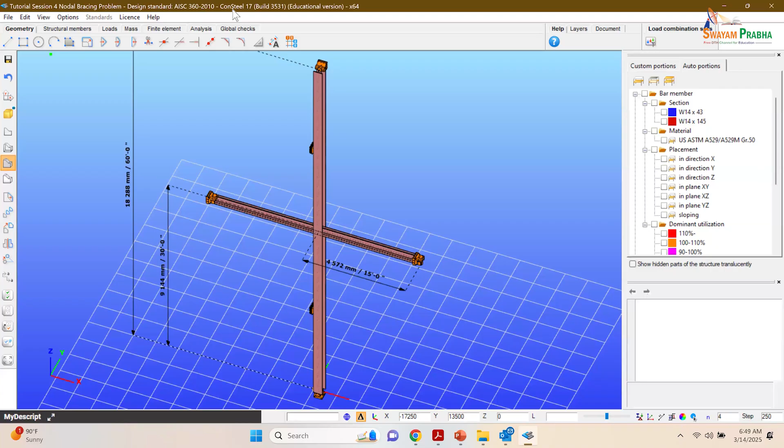Our basic bracing case here. So, in the analysis models folder on the Google Drive, there's a file that's basically a CSM file for Consteel that says tutorial session 4, nodal bracing problem. So let's pull that up and look at it together. I'm going to use the model in Consteel to explain the problem we're solving.

This is a problem that is an example in the AISC Design Guide 28 on stability design of buildings. What you're looking at here is a model of a situation where you've got some sort of a vault or an opening that this column is adjacent to. And so the column needs to span from top to bottom.

18.288 meters, or 60 feet, top to bottom. And because of that—it could be a boiler we're supporting in there, or some kind of shaft opening that we can't put framing into—that column has to span that entire height from top to bottom, but we can brace it at the top and the bottom.

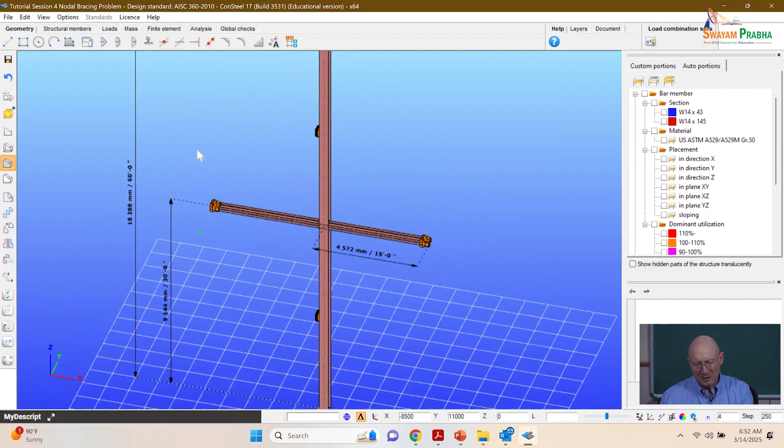So what we're going to try to do is put in a moment-connected beam. A typical term for this is a flying beam that basically flies across and is framed into this column at its mid-height. And you can see how that's working there, right? So that's still a relatively lightweight beam that's framed into the middle of the column.

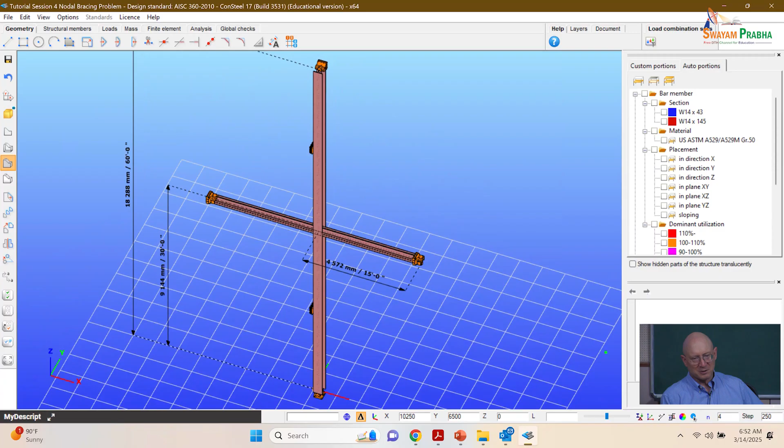The total span of that beam is 30 feet across this shaft or opening. And so we can basically tie that beam in, simply supported, into other stuff at its end.

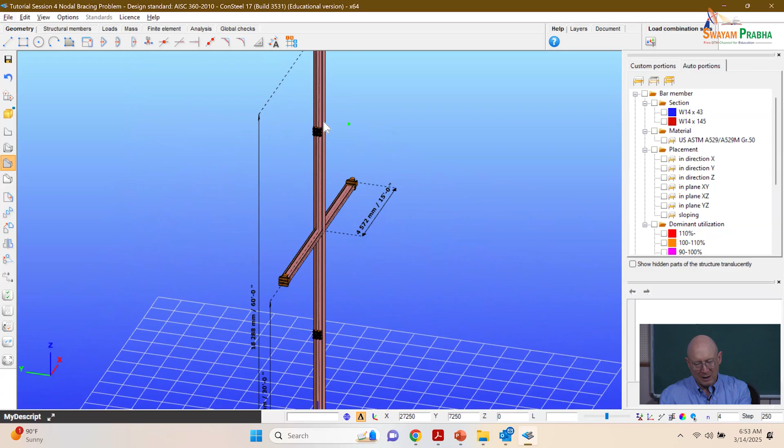Now, in addition, we've essentially got 4 stories here that are each 15 feet, and so within the plane here adjacent to the shaft, we were able to get some rod bracing in to brace the length. So in the weak axis bending direction of our column, we've actually got an unbraced length of 4 unbraced lengths of 15 feet.

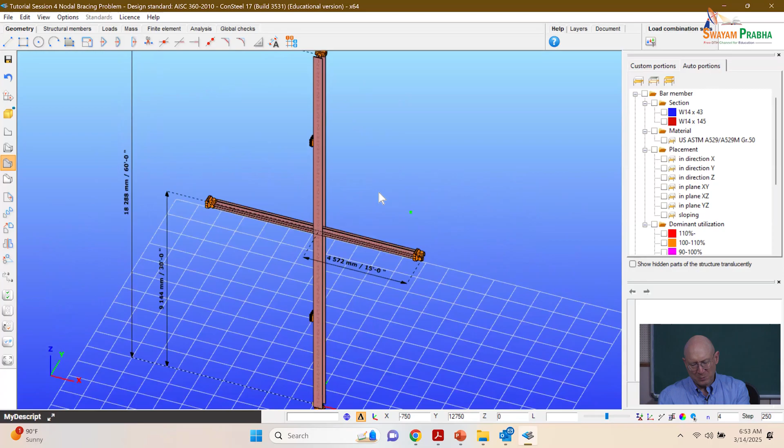Again, it's simply supported at the top, and that's it—that's pretty much our system. Now you can play with this.

If we turn it to a line mode, you can click—let me turn off the portions dialog there—so you can click on a bracing and say, okay, I'm supporting the column at the top in the X and Y direction, and I'm preventing twist at the top of the column. So that's my boundary condition at the top of that column. I'll hit delete selection to take away that.

If I look at the boundary condition we're using at the ends of the beam, X, Y, X, X—so we're preventing twist about the X-axis at the end of the beam, and we're preventing X and Y displacement, but allowing Z. The reason for that is if I restrain the Z, I would get some weak axis bending in this flying beam when the column shortens.

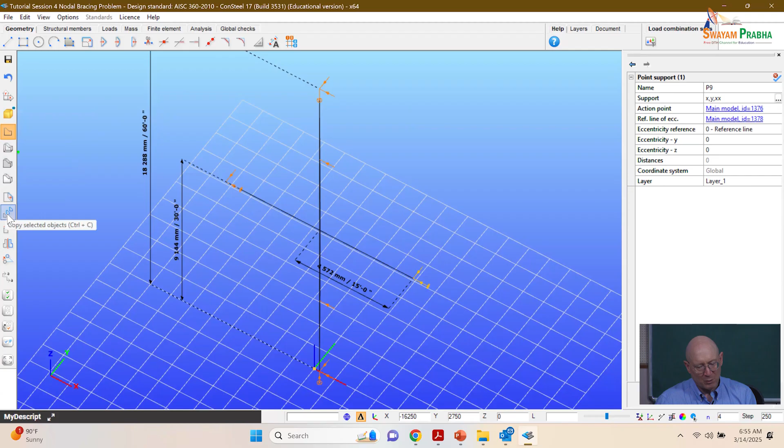And so we're basically trying to do an idealization where we're not going to be producing bending in that beam, right? So here again, the beam is in strong axis bending in terms of supporting the column—buckling major axis bending in the direction normal to this side of our shaft.

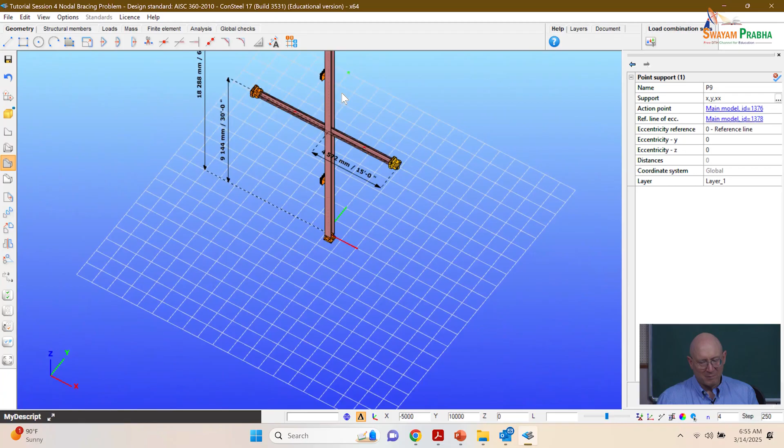And other detailed boundary conditions—if we zoom in, if I click on this guy, I can see... well, I've got to delete the other one. Okay, so click on here. Oh, that's just a support in the X direction, so that's like giving me rod bracing into the web there at the middle.

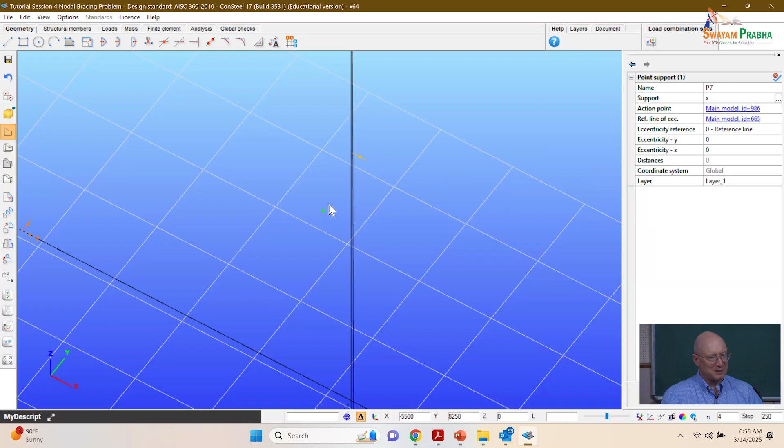So remember, with a situation like this, we might need to worry about torsional bracing or torsional buckling, right? Again, we're spanning 60 feet, except we're grabbing the middle of this, and it's major axis bending in and out of, or normal to, this wall of the shaft. Our flying beam is in major axis bending to try to provide support to the middle of the column.

Okay, so let me ask you: what type of bracing is the flying beam providing to the mid-height of the column? Nodal, or point, right? Okay, this is a good example of a nodal brace, or a point brace. Okay.

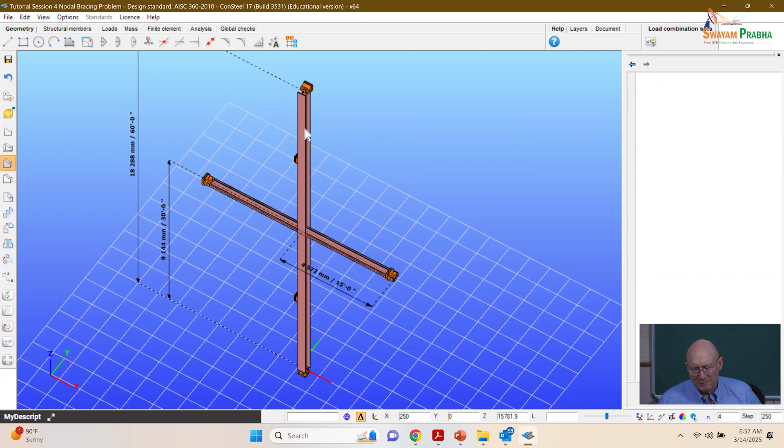Now the sections here, if I select on the column, when I defined the column model, I defined one member up for the whole 60 feet. Are you talking about the column? Yeah, and KZ? KT, the torsional - KT won't matter. What I call J is KT? Yes. So KT will be equal to KY in this particular case, the usual case we were talking about the other day.

When we say KY there, KT is basically the sum of BT cubed over 3 of all the plate elements - I was talking about the effective length in torsion. So the effective length in what we call the minor axis, KZ, right?

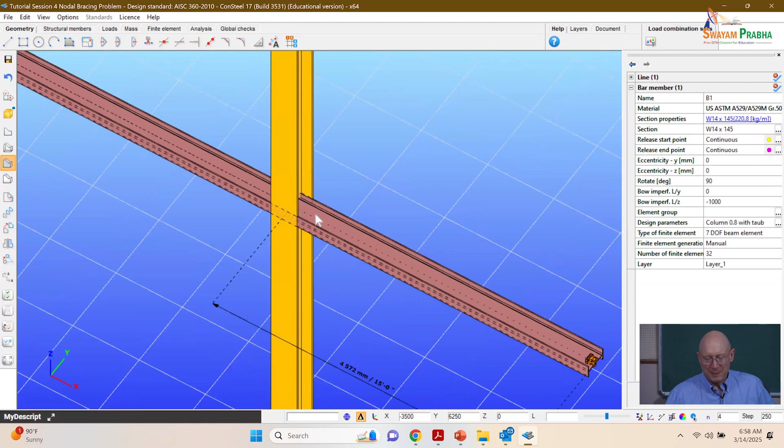Let's talk about that. What I'm showing you here is KZ equal to KY. Again, these braces right here, what I just showed you when we clicked on that - I've got to delete that selection. So that's just support in the X direction only. So KY will be different. Okay, thank you.

So if you basically said what's the unbraced length LY for the column, what did you say it is? The whole thing is 60 feet. It's 15, 15 feet, right? And then what's the LZ? It's 30, 30 feet. Everybody good? Okay.

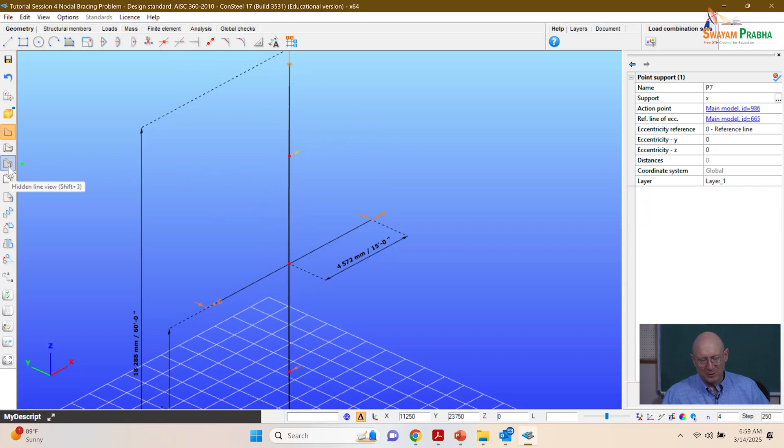All right, so that's our situation here. We'll come back to this view again. Now I'm going to show you a few things that are fairly powerful in Consteel.

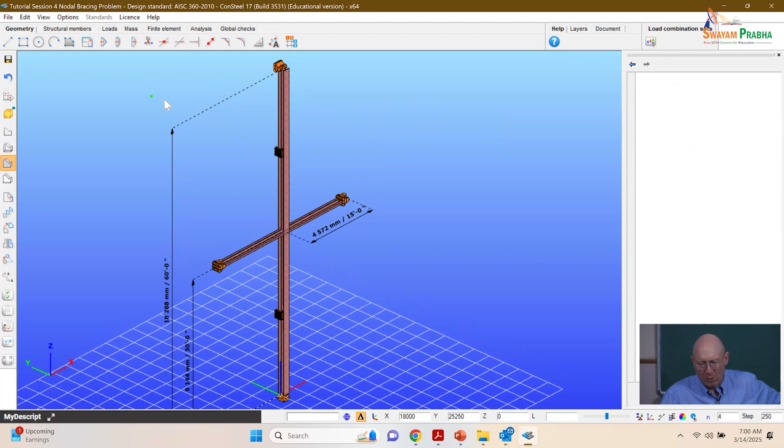I guess the other thing I haven't shown you, but there's a handout, a PDF file that parallels this and explains the loading. We've got an axial compression coming in at the top of this column, 1,400 kilopounds, so 6,227.5 kilonewtons that we're supporting.

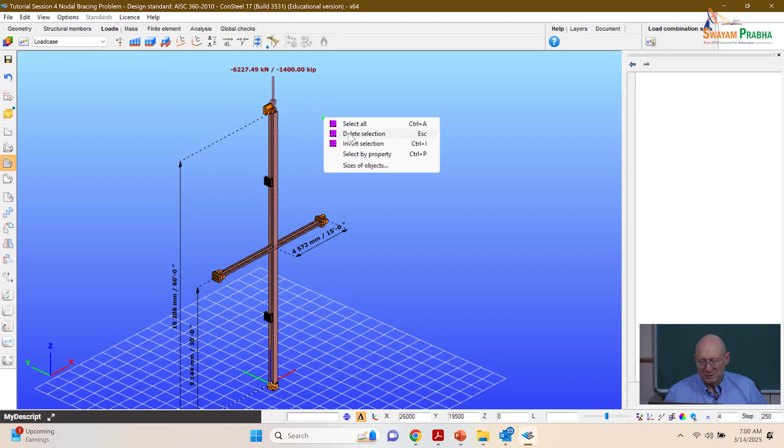And if I come back here to look at what this column is, if I click on it, I can see in the object properties table that's a W14 by 145. I put that in imperial units - I should have put it in SI - but that's nominally 14 inches deep, 145 pounds per foot for the column.

This is exactly the load and the section that's in Appendix, in Design Guide 28 of AISC. And then I'm using here the flying beam to get that brace at the middle. We're getting bracing stiffness to the mid-height of that column from the bending stiffness of the flying beam, right? You can see that's a W14 by 43. So we're going to look at trying to justify that W14 by 43, and we'll go to the handout once we've worked this through Consteel a little bit.

And then I'll show you, at the end, we're taking it in reverse order - we're looking at the more sophisticated, computational solution with Consteel first. Can we justify this W14 by 43? And we're going to justify it, otherwise why would I be showing it to you, right?

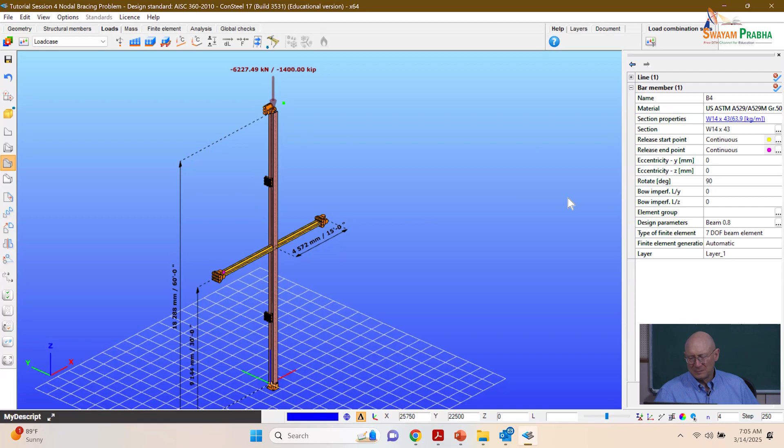The Appendix 6 equations avoid us having to set up an analysis and do all this fancy work - you can just apply this formula and get something, but I need a W14 by 61. Can I go lighter than that? You've got to do some analysis, and the analysis has to consider imperfection, because it's the imperfection along with the axial load that's causing our brace force. We need an imperfection in that column. So in Consteel, if I select that column, I just want to select only that column here.

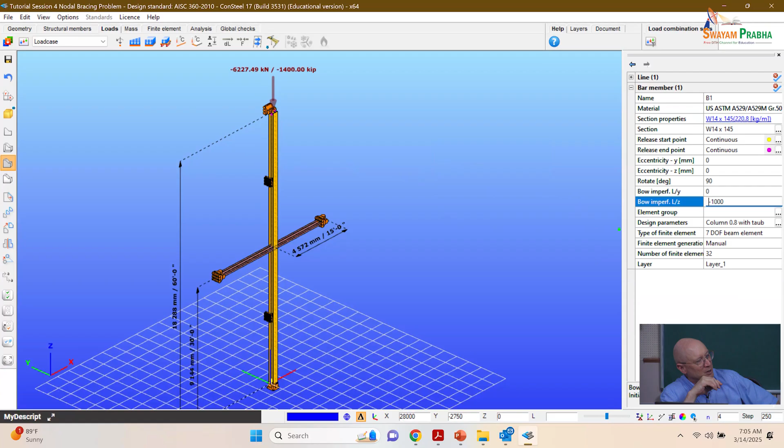Notice in this row it says bow imperfection L over Z minus 1,000. That's a little cryptic notation, but once you understand it, you can put in minus 1,000 and it will put an L over 1,000 bow in that column in the negative direction.

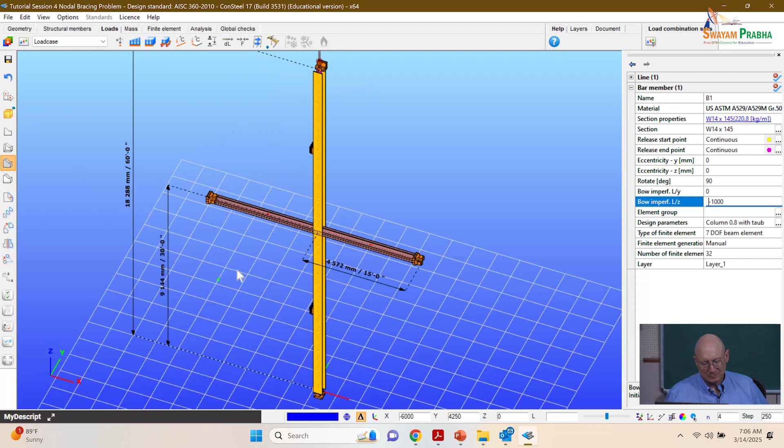Negative direction, I think, being here in the negative y. Okay, let's see. Yeah, negative y. Actually, no, I think it's going to be positive y. So I think it's a local thing going on there with that negative number.

Notice the other thing is we had to, from the default, rotate that column by 90 degrees in order to put it in major axis bending in the direction we've got it.

I'll be frank, I think this is kind of a beta version of Consteel looking at how to implement the AISC provisions. A lot of different things Consteel does, and they have basically what we need to do for the direct analysis method calculations in here.

To get at them, we have to go to design parameters, and if we click on these double dots, we come in here to stability design settings, where I want to set an entity for a design setting. Under buckling or compression members, I want to run a direct analysis solution. This is the way Consteel allows you to say I want to put in a stiffness reduction.

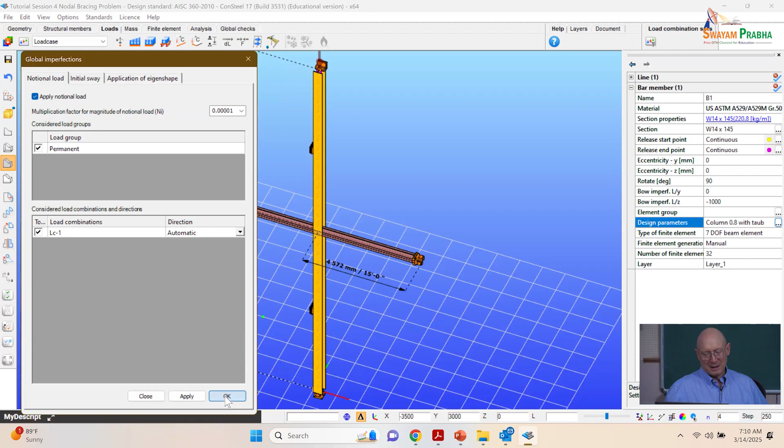So that's for the column. For the beam, I've got a different property object. If we go in here for design parameters, for the beam I just want to do the 0.8 stiffness reduction, so I don't have the tau factor here. So we've got a 0.8 stiffness reduction on all elastic stiffnesses in this problem.

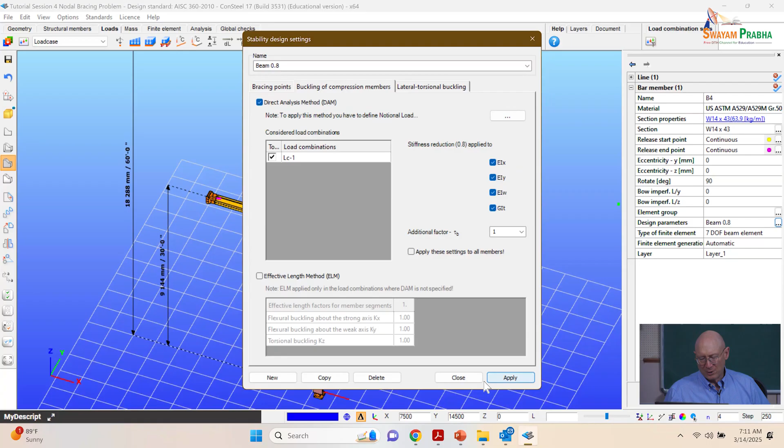And in the column, because this is a relatively highly loaded column, very, very high load on the column, by direct analysis method the specification provisions tell us to take an additional inelastic stiffness reduction factor on the column. Okay, so that's the setup of everything in Consteel.

If we want to inspect things going on, if I really zoom up, you can see, oh, that's actually the offset where I've got a bow in the column.

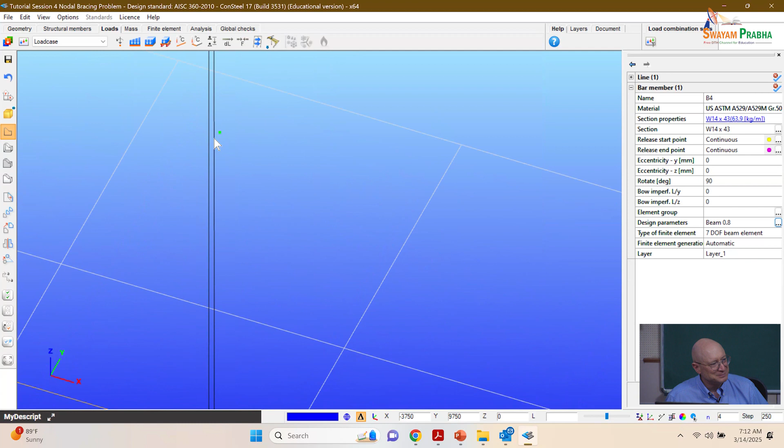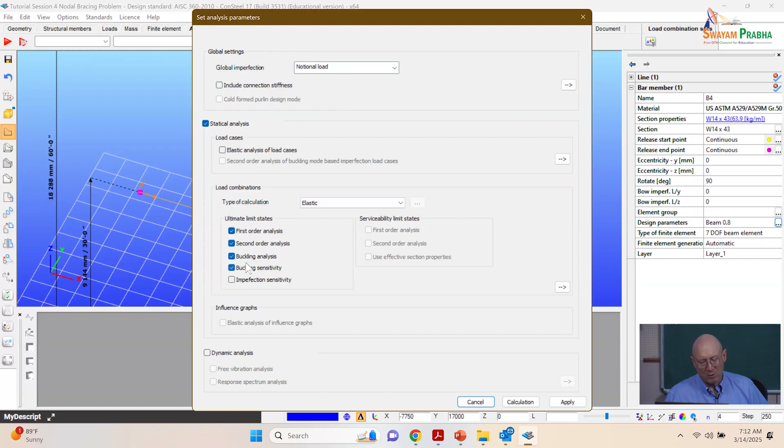Okay, so now let's run our analysis. In the analysis, I have to tell it global imperfection notional load, and so all this will kick in, and I'm gonna do everything else similar to what we've done with the other examples. I'm gonna do a first order, second order, buckling analysis, and buckling sensitivity. So let's run the calculation, and I'll turn off this window and go back to drawing an image.

And so, clearly, okay, that's the way it's deflecting. So I'm compressing this column, and the column is bending out of plane.

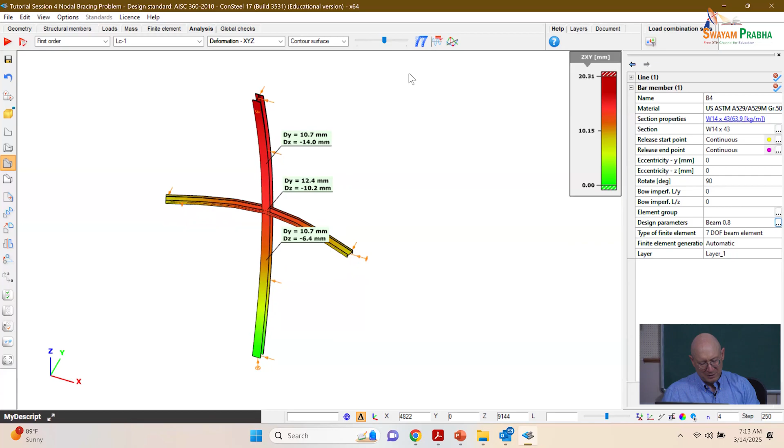It's apparent that I'm getting some help from that flying beam, but it's not really holding that point as if that point were braced, right? It's what we would call a partial bracing to that point. But hey, if I've got some stiffness and that's enough to where I can then make this problem work with a lighter brace, okay, so then good. I used 2 sizes smaller on this flying brace.

Okay, if we look at some other information here with this, if we look at internal forces and bending moments, okay, so this is what the bending moments look like here on this. So you can see that restraint we're getting from the flying beam is definitely helping resist the bending of the column from this bow imperfection, at least some.

And we can see what these are the major axis. This is the major axis bending moments that we're getting in that flying beam.

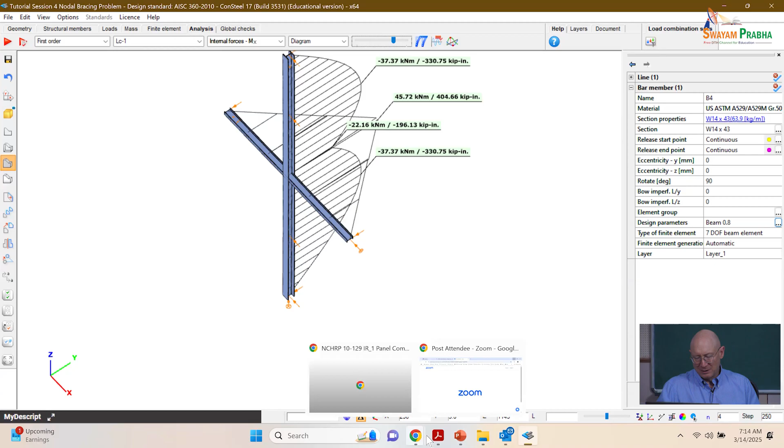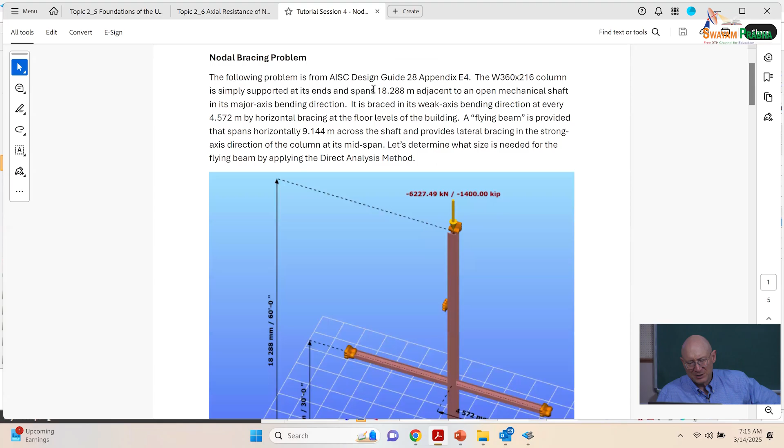Okay, so now let's go to the handout, and we can talk through what's going on with the problem. So this has a little bit of a textual description of what I explained to you, and basically showing you the image from Consteel of the problem.

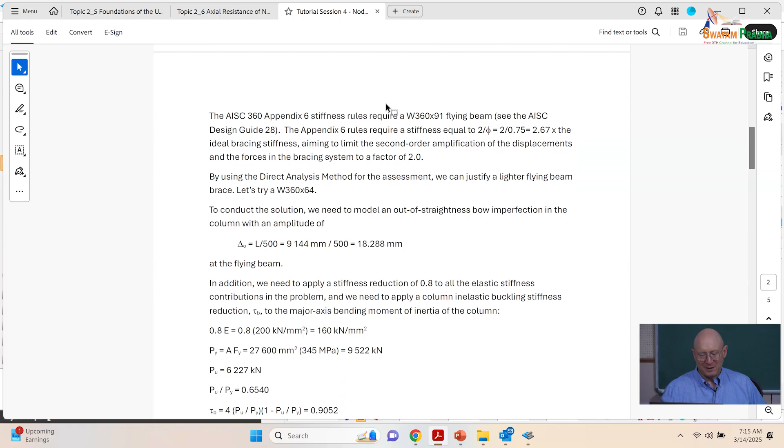So I put in an out of plumbness of 30 feet over 500, but that would be 60 feet over 1,000. Probably should have said it as 60 feet over 1,000. So 18.288 millimeters is the out of alignment at the brace point in the middle that we would be required to consider.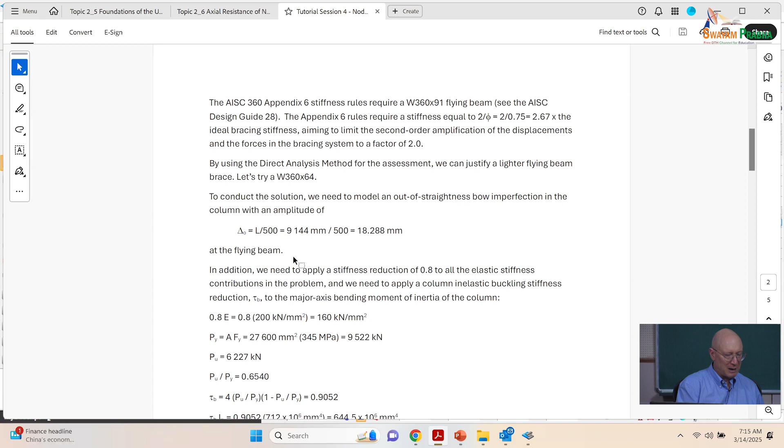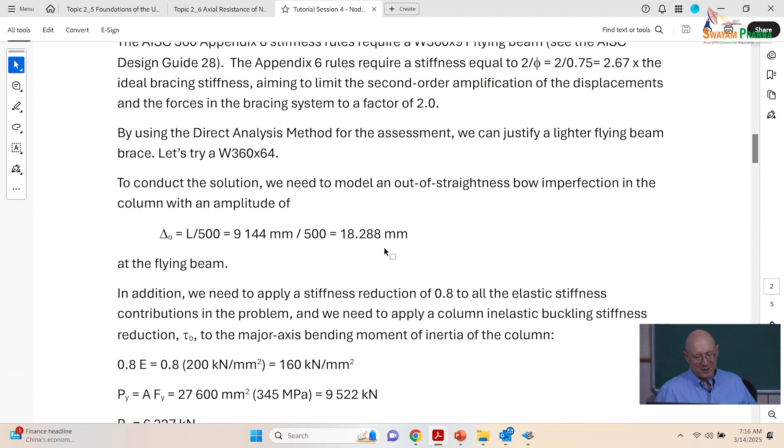That's what I need to design my bracing beam for. Now, if we're going to do a direct analysis of this, so here's my initial imperfection or out of alignment at the brace point. We usually, for out of alignment, say L over 500, where L is the unbraced length between brace points, right? So it's the 30 feet over 500.

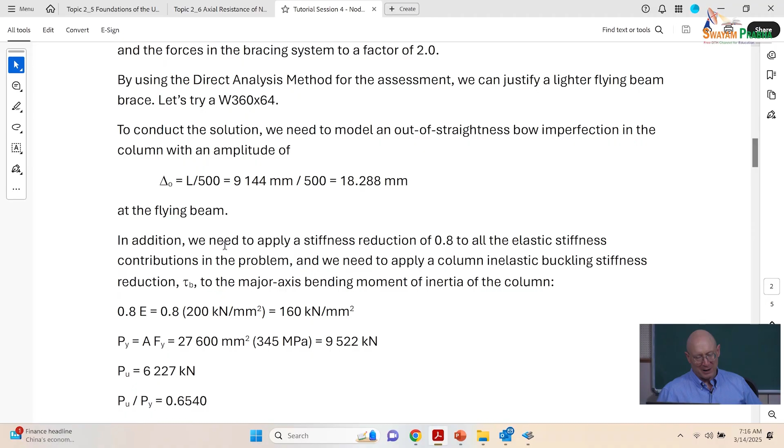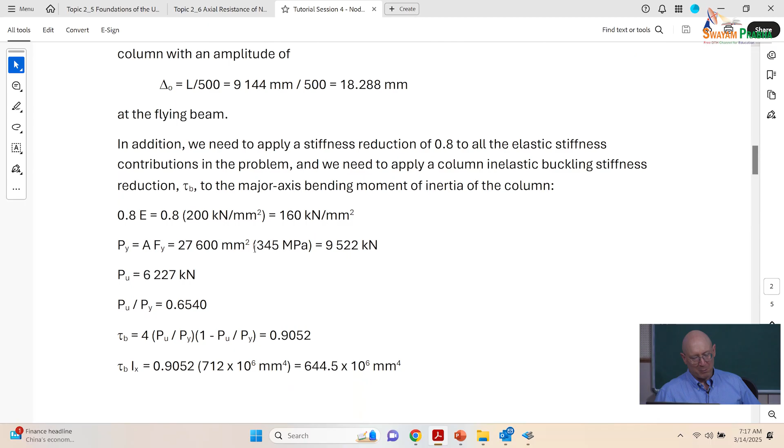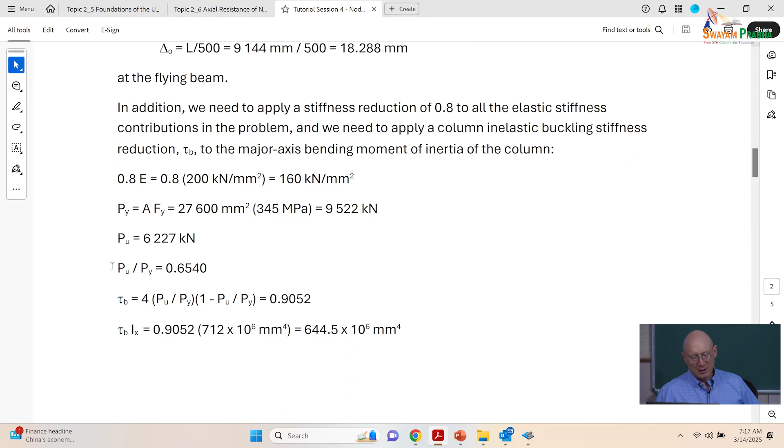We've got our 0.8 E, which is 160 kilonewtons per millimeter squared. We've got a PY, that's the area of our W14 by 145 column times the FY. We've got a PU that's 6227 kilonewtons. So PU over PY is 0.65.

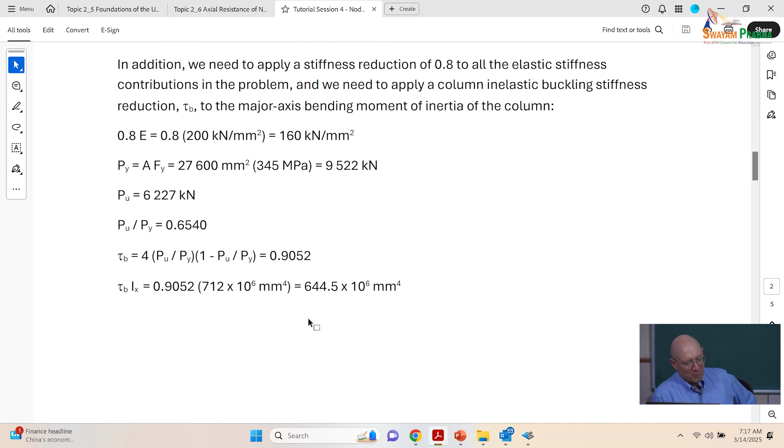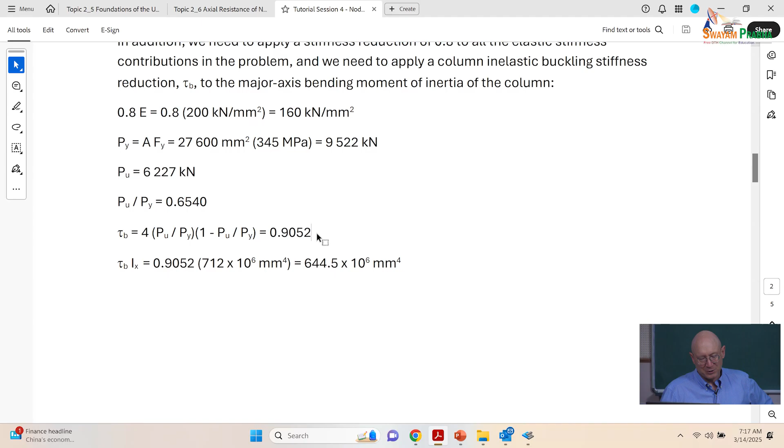And so this is larger than 0.5. We're required by the direct analysis method to consider a reduction in the flexural rigidity. And so this is the tau B equation, and that reduction is 0.9052. So that's where the 0.9052 I just showed you in Consteel came from.

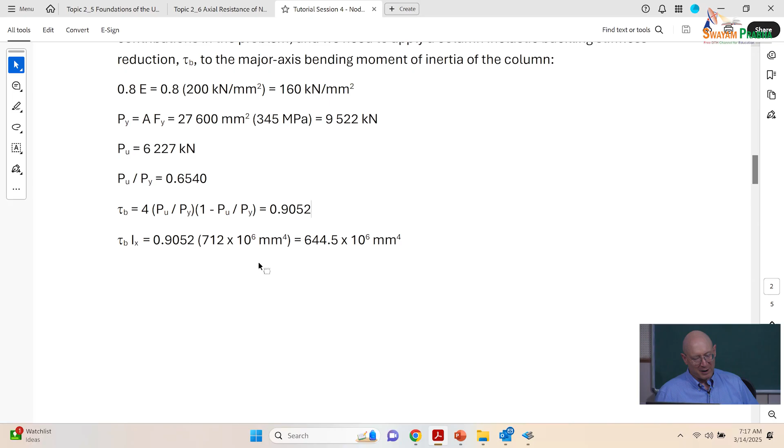If I were to, so Consteel is going to apply that to IX, and so this is the reduction on IX if I want to show it as just what the reduced value of IX is. Okay, so here's the screen capture of what I just showed you in Consteel for the way the system's deflecting, and here's the screen capture for the moments I was just showing you.

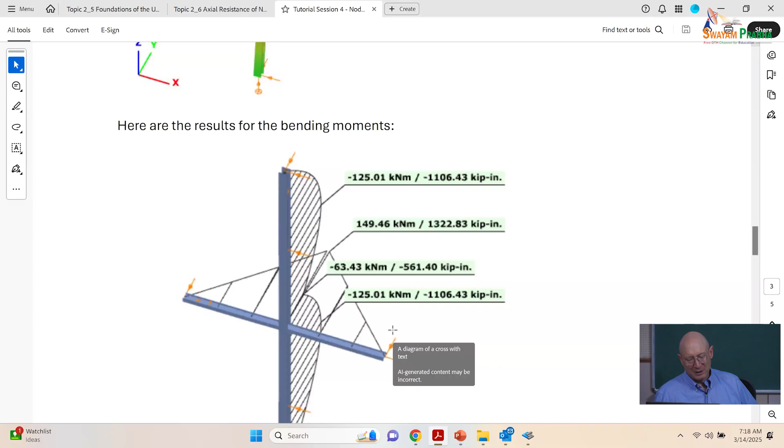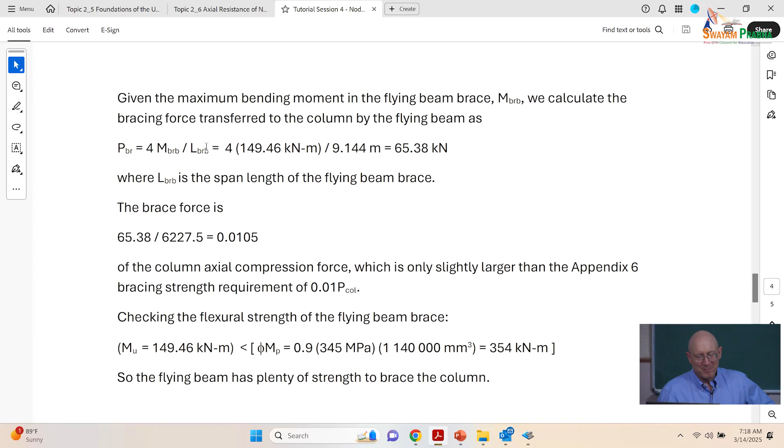So if we want to check what sort of brace force we're getting here, it's the maximum moment in that simply supported beam is PL over 4. So if we back solve for P, 65.38 kilonewtons. And so the ratio of the brace force to the force in the column is slightly larger than 1%. So that's actually not so bad.

If we look at the nodal bracing or point bracing provisions, it's essentially double of what we just did in the derivation with the panel bracing. So 0.01 is the requirement in Appendix 6. Oh, we're just barely larger than 0.01 here. And there's several reasons for that. One is that we haven't really exhausted the entire axial compressive strength of the column.

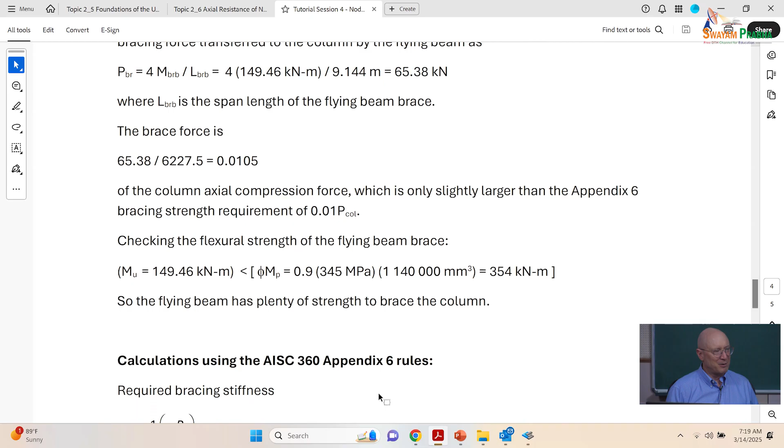So that's helping us some. Now if we check the flying beam brace, so the MU there is okay, actually if we go back, I want to make sure it's clear here. I think I was just showing you moments here from first order. I need to show the second order moments. So these are the moments that we're working with. It's a second order analysis with a reduced stiffness.

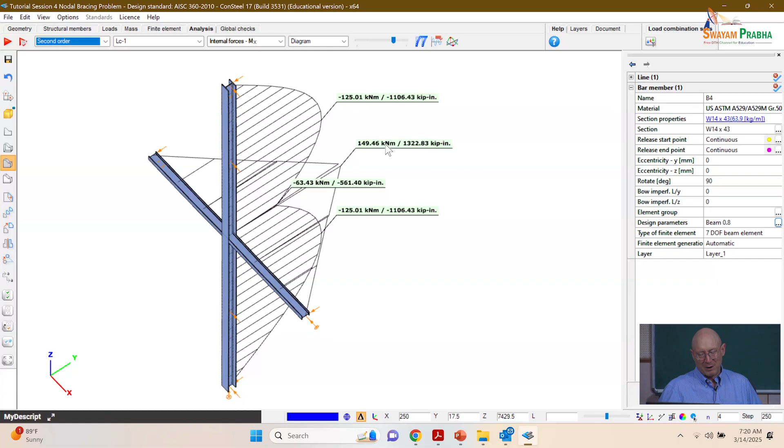So these are the moments that we're actually working from. Now if we look, is that flying beam sufficient? I can...

consider the LP and LR of the flying beam and the CB I've got here, which is 1.75, and I can determine that the CB, when we scale the uniform bending strength by CB, for the unbraced length we have of basically 15 feet in the flying beam, the AISC beam flexural strength provisions tell me I can get plastic moment in that beam.

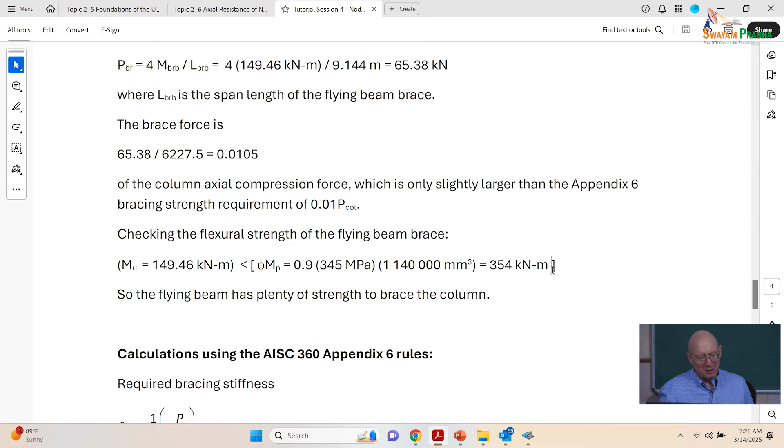It's got a compact section. So the MP is 354 kilonewton meters of the flying beam. I'm actually only using...

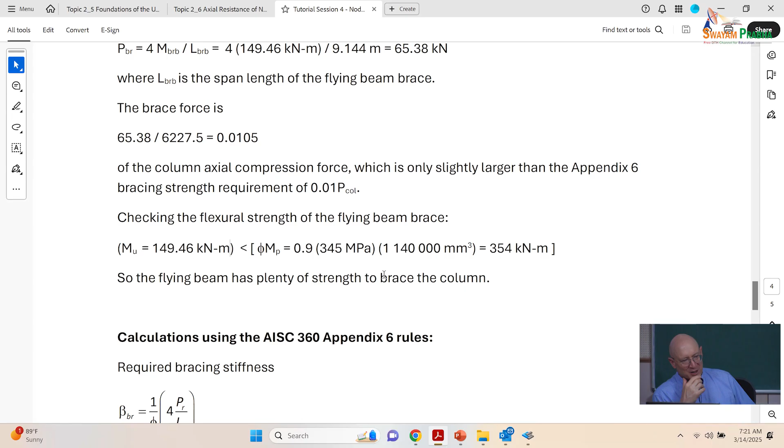149.46. So our flying beam's got plenty of strength. We're good. If you try to use one size smaller and you go through all this, it fails. So that would be a process you could use.

If you're trying to lighten up that flying beam, you could use this type of analysis to get there. Now to show you how this would work if we use the Appendix 6 rules.

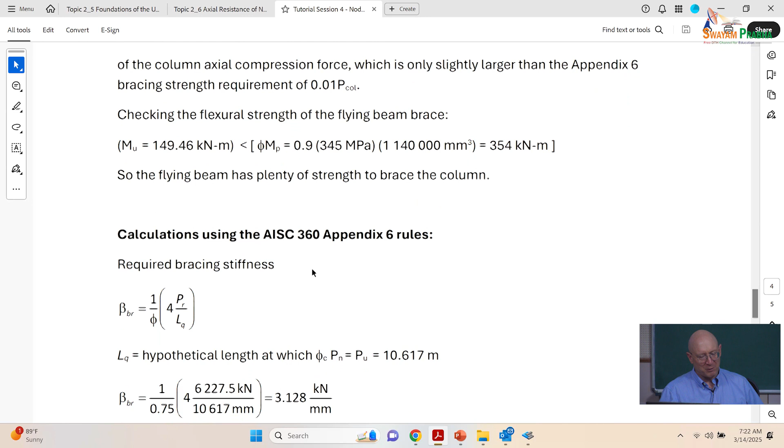So I derived for you the relative bracing or panel bracing rules. The point bracing rules are a little bit more difficult to derive. But for this basic case with a single point brace at the middle, it works out when you do all the refinements.

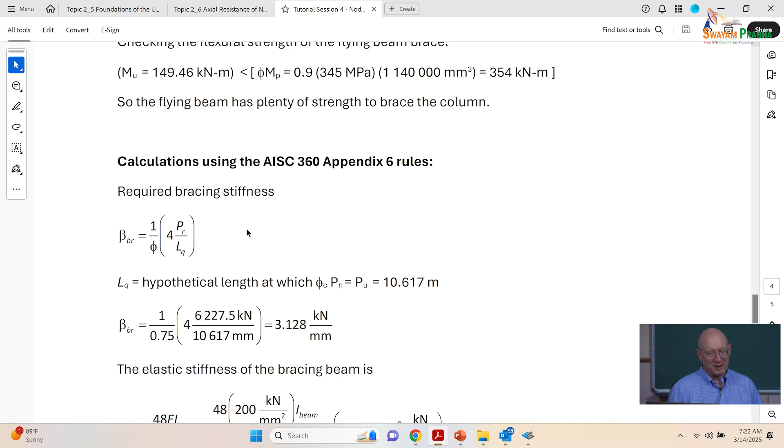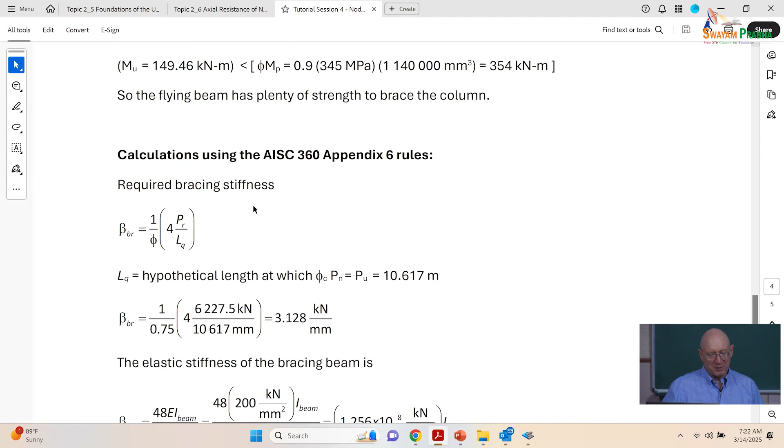The point brace basically needs to have twice the stiffness and it takes twice the force. And so what you get with the commentary refinements in Appendix 6 is here's your required bracing stiffness, and so...

the 4 PR over L, and here it's an LQ. Again, the column does not have, is not loaded to its full capacity, and so the Appendix 6 requirements actually...

allow us to say, well, if I've given the 1,400 kips on the column, let me back calculate how long of a column could I use that would have a capacity of 1,400 for the W14 by 145. And so that would be 10.617.

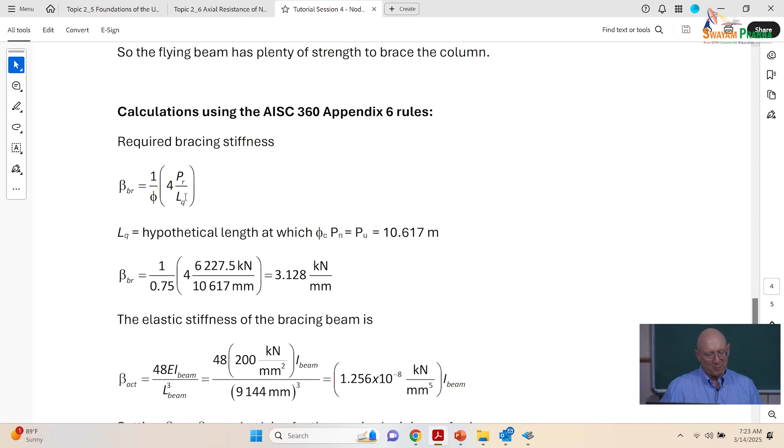It's a little bit larger than 15 feet, 30 feet. And so that's what we can use there. It gives us a little bit of a benefit for the fact that we're not fully loading the column, but it's a conservative approximation. So if we take all that and put it in and calculate the value from the equation for the required bracing stiffness, it's 3.128.

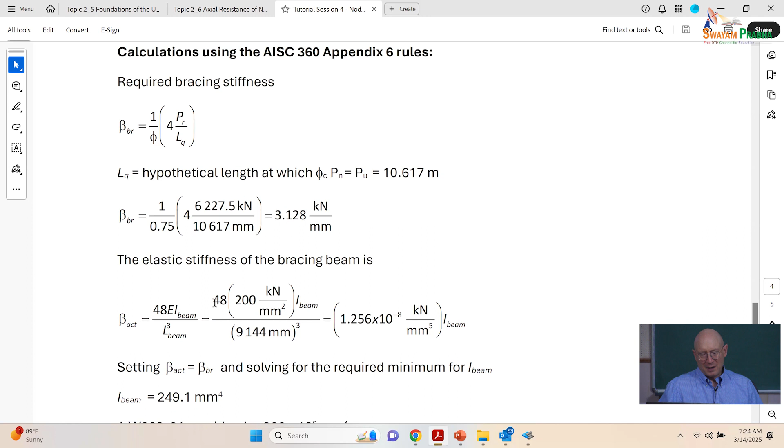If we look at evaluating a W14 by 61, which is 360 by 91 in SI units. Let's figure out, well, what bracing stiffness do we need?

Well, a simply supported beam loaded at the mid-span, the mid-span load deflection, basically the stiffness is 48 EI over L cubed. And so let's substitute in there to find this is the bracing stiffness we would be providing, beta actual, as a function of the moment of inertia of the beam.

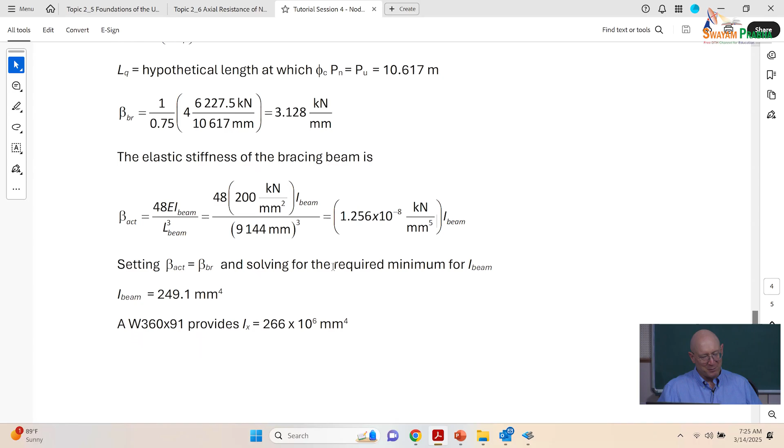So let's set beta actual equal to the required bracing and solve for the moment of inertia we need for the beam. We need 249.1, and a W360 by 91 or 14 by 61 provides the moment of inertia that's slightly larger than this.

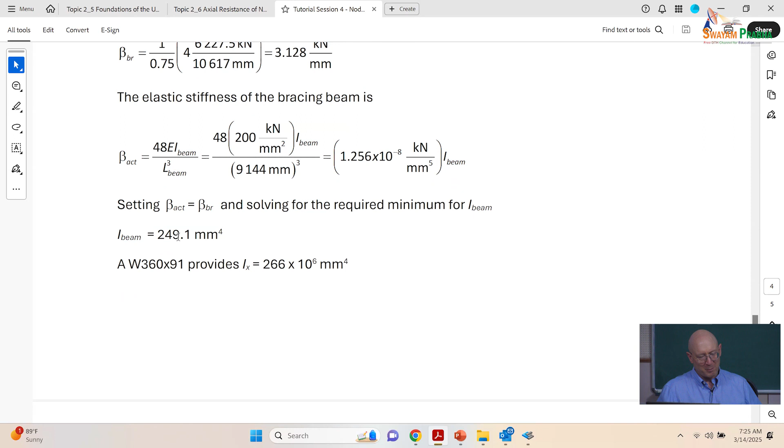So that's the size we would have to use based on the Appendix 6 rules. Then the beta actual on that is 3.34. We can plug that back into our required bracing strength equation.

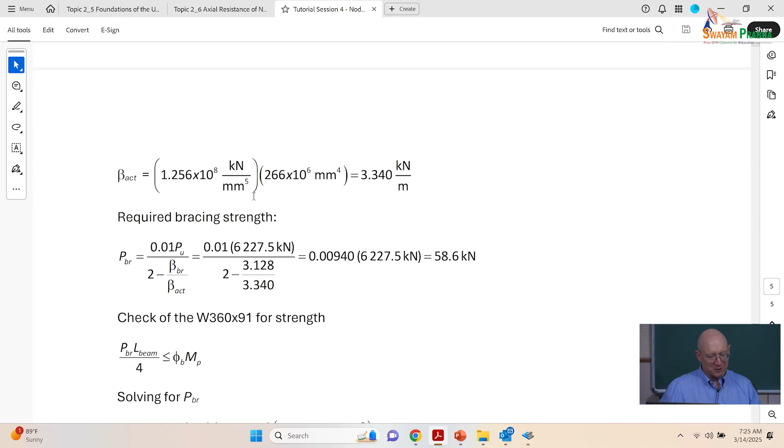We get a little bit of reduction in the bracing strength demand because we're using an actual bracing stiffness larger than the required. And so this equation here then tells us, well, the bracing force we need to withstand is 58.6.

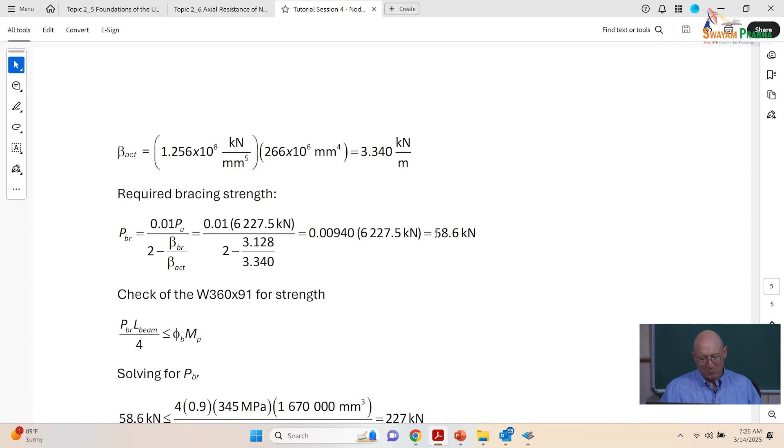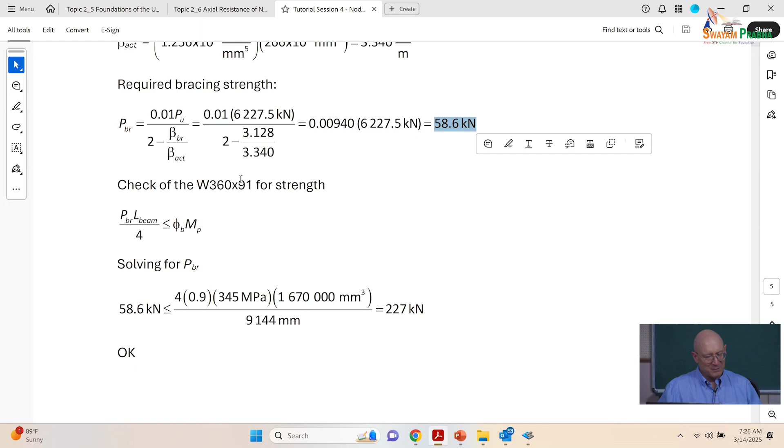The moment we're generating, the W14 by 61, is PL over 4. And that if we equate that to phi MP, recognizing that for the unbraced length we have in the floor beam, we can develop plastic moment.

So our PBR here is 58.6, but if we look at 4 times the phi factor times MP over L, solving that here for what do we compare to PBR, we can provide 227.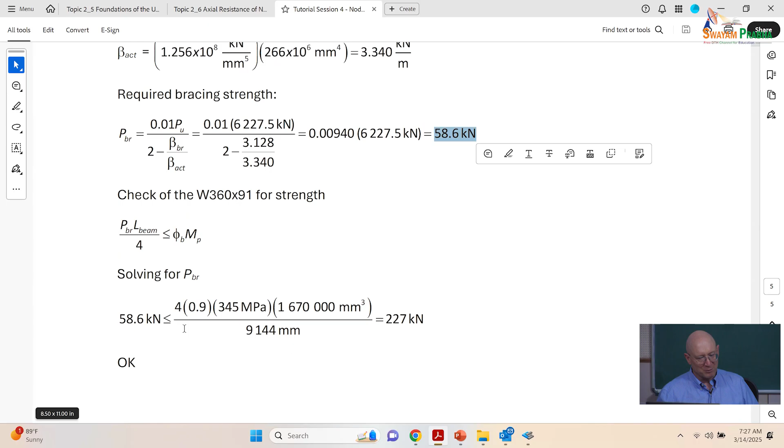So the W14 by 61 gives us more than enough strength to provide bracing to the column. So what the W14 by 61 is going to do is, if we go back to Consteel, if we ran it with a W14 by 61, look at the deflected shape,

we wouldn't see a deflected shape like this. We would see a failure mode where essentially there's very little movement at the middle and the column buckles into an S shape. So here it's more of a partial brace, but it works.

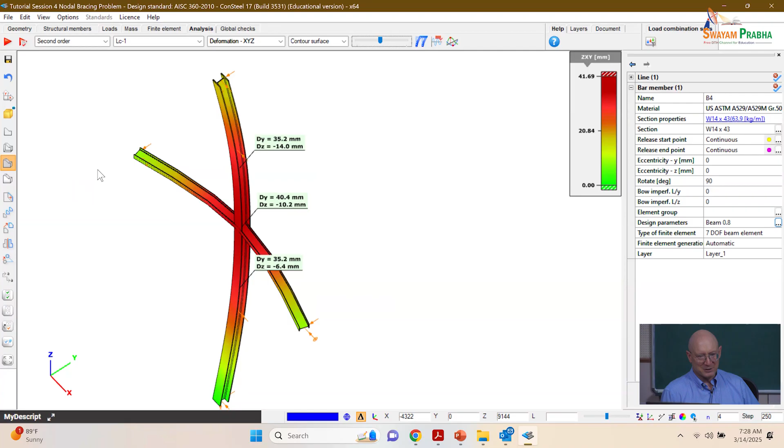Appendix 6 doesn't give you the capability to do that, but you can go to direct analysis method to be able to lighten the bracing system and design the partial bracing fairly rigorously.

Now, if we look at just a couple of other things here in Consteel, one thing that we would still need to do, but in the interest of time, we won't work through that.

In general, we would need to check that the W14 by 145 column, if it's bent into a mode that is an S shape, if it has an imperfection that's an S shape with an inflection point at the brace, that's the way that would be most damning in terms of imperfections on the column.

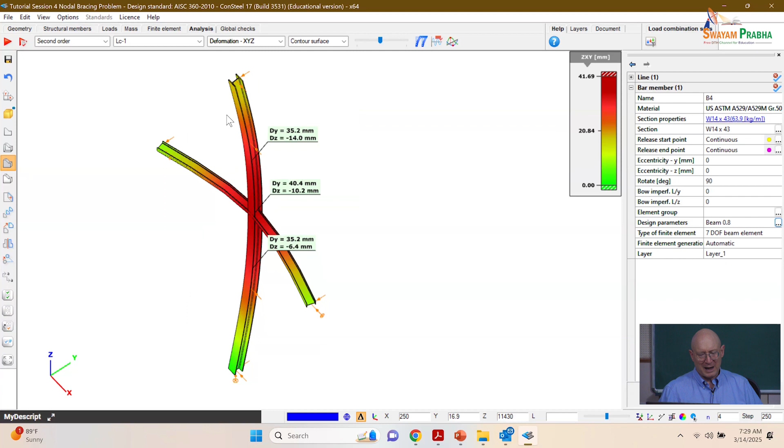If it is braced sufficiently, you may have the largest moments in the column based on what we've got here, and the moments in this problem. So these moments, second order here.

But we would also need to check the column, is it still working if the imperfection is an S shape? Is that brace enough to limit the moments in the column here at strength? That's a little bit of extra work that we have to do. We just justified that this brace is adequate in strength, but is it reducing the moments in the column enough to where the column still works?

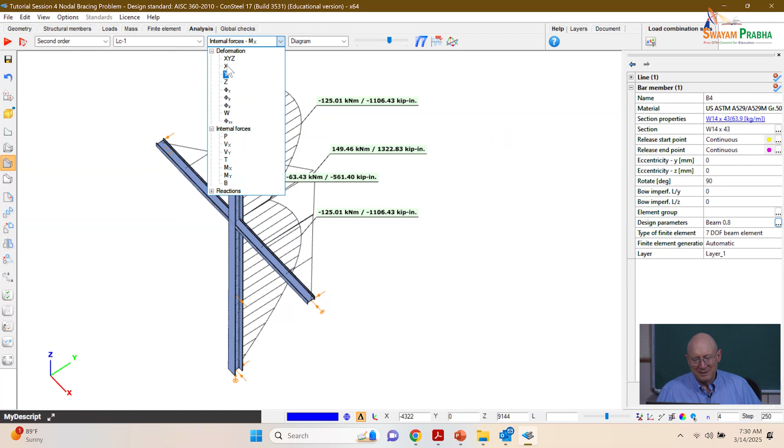If we go to buckling analysis. So our buckling analysis here, let me turn this so that's, okay. Yeah, so it's actually buckling it toward us. We'll tone down the buckling mode there a little bit.

So the first buckling mode is kind of the way, what we're seeing here with the partial brace, right? We would expect to be getting some of the largest amplification of the displacements based on the way we put this bow in the column.

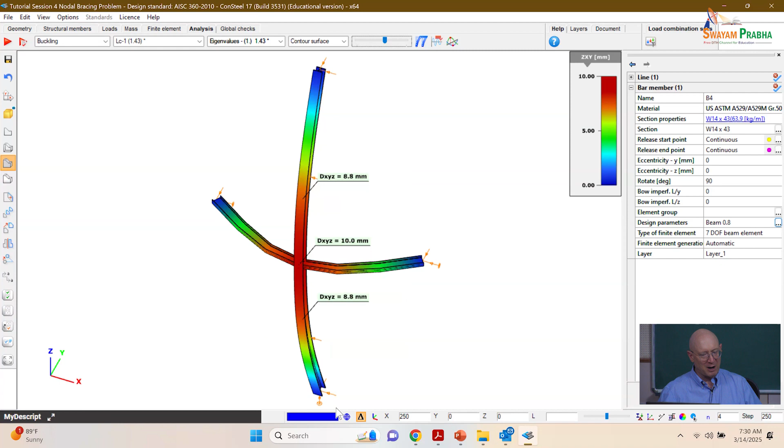But if we look at higher buckling modes, if I do 1.99, that's the buckling mode where the column is buckling into an S shape. And if we go one more, let me scale that down a little bit. What kind of buckling mode is this?

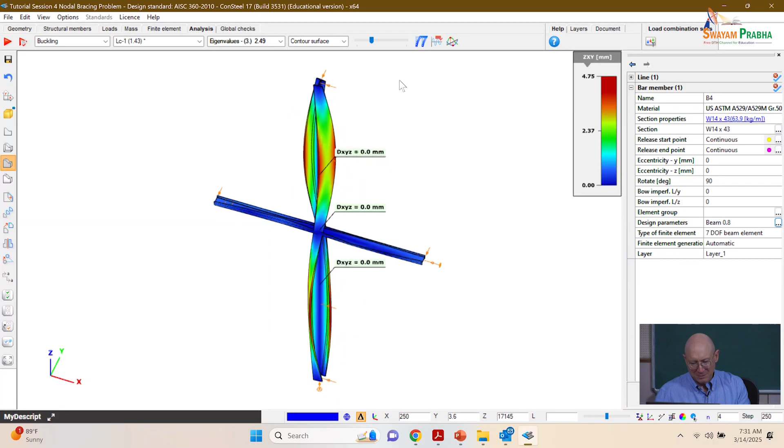Torsional, huh? Okay, so if you were really alert, you might have been saying, wait a minute, I've got a rod brace into the middle of that. I better check torsional buckling over where KLZ is 30 feet, like we were talking about earlier. KLY is 15. So it turns out that's not the critical buckling mode here in the problem.

Yeah, so yeah, I think you were looking at the equation I showed you for the nodal bracing. Good question. The question is are we doing 2 times or 4 times the ideal bracing stiffness here, right? Yeah, that's good. You noticed that.

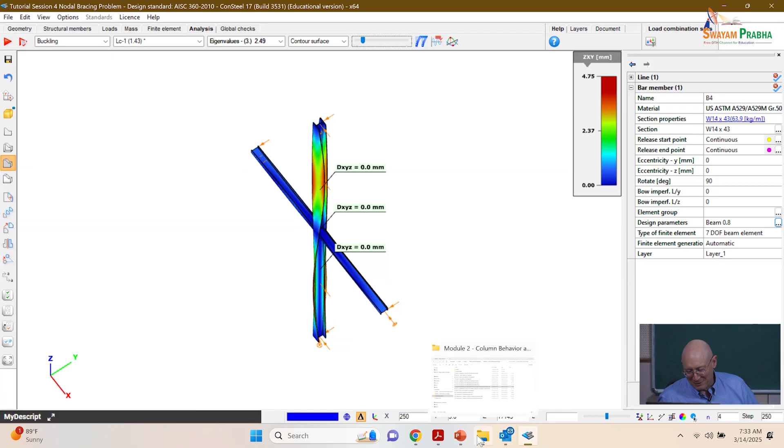It turns out that the ideal bracing stiffness for the nodal brace here is 2 times PR over L, and the simplest way to conceptualize that is the derivation we did earlier for the panel brace. That's just one side. So now we got a top and a bottom, and both are pushing on the brace, so 2 times. Make sense?

Okay. So the ideal bracing stiffness here for the point brace or nodal brace was 2 PR over L, and then we multiplied that by 2, and also we put in the phi factor on it as well.

Considering the area of, or the size of the brace required, so what will govern more, the strength of the brace or its stiffness? It's really problem dependent, right? And so we have both of those requirements that we always have to satisfy.

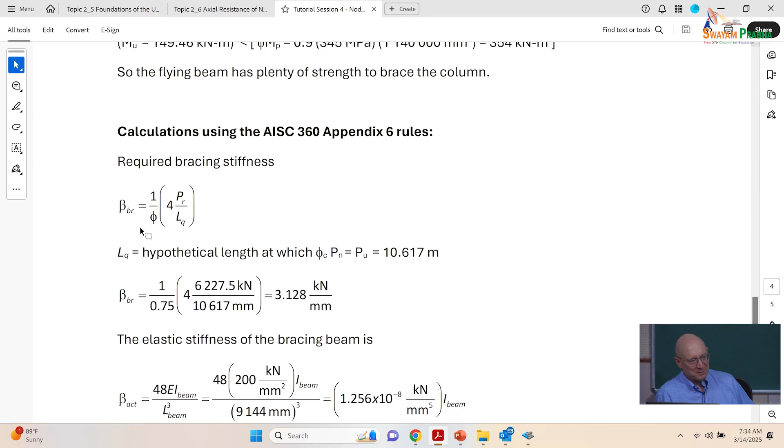So in this problem, I think, let's see, when we followed the Appendix 6 rules, it was the stiffness requirement that was basically requiring us to use that big of a beam, right?

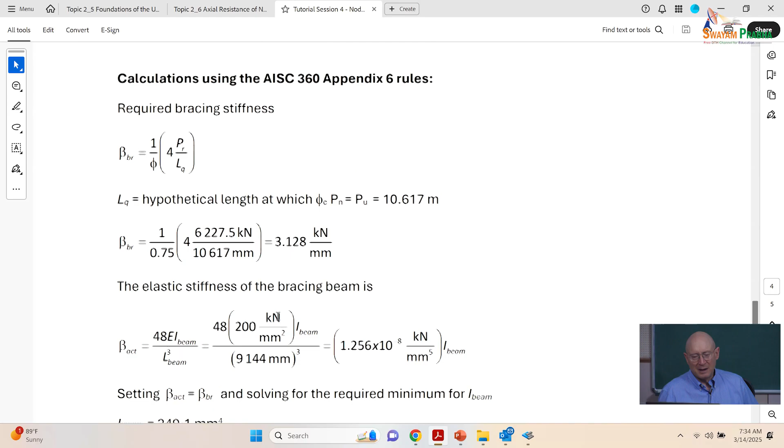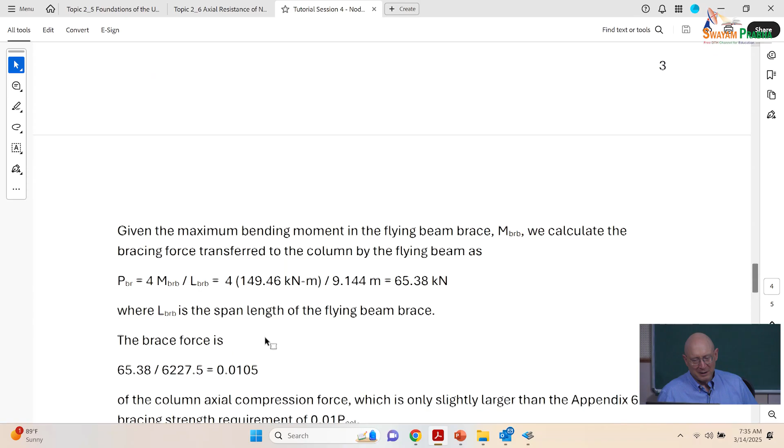And let's see, when we were doing it by direct analysis method to justify the lighter brace, here also, when we check the strength, we're plenty good, but then the stiffness is basically coming in by what we did everything here.

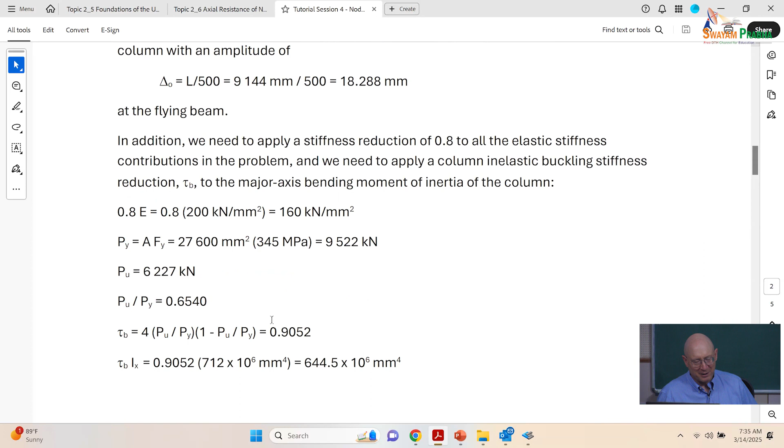You know, you could say, well, how do I know to try a W14 by 43 here for this beam? That would be a good question. The simplest way to do that is you could say, okay, well, I checked it by the Appendix 6. I needed W14 by 61. Okay, great. I can model that. I can see I'll see that it's working.

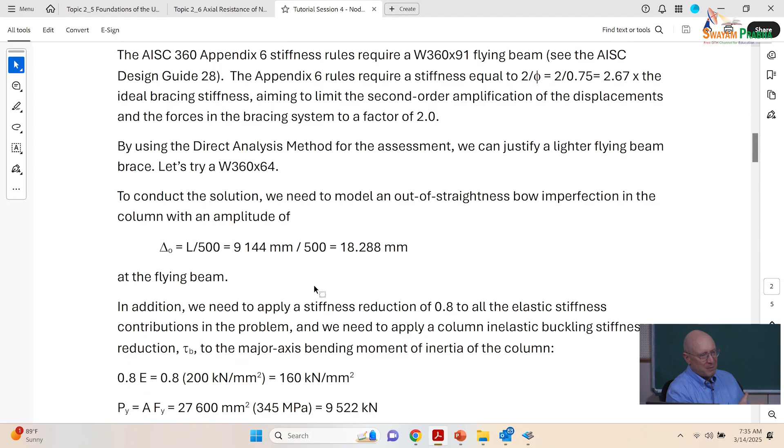It's holding that middle of the column. I'm not getting any significant displacements there. But then I can say, well, okay, but that's an awfully big flying beam. I'd like to use something smaller. And so let me try one size smaller.

And say, oh, it works. And I'll find it works with plenty to spare. Let me try the W14 by 43. Oh, it's working. But I have to do all this analysis to do that. And I skip the part of, I also have to check the column to ensure that the column can still work, given I've got a much softer brace, right? If I go one size smaller, then it's not going to work. Okay?